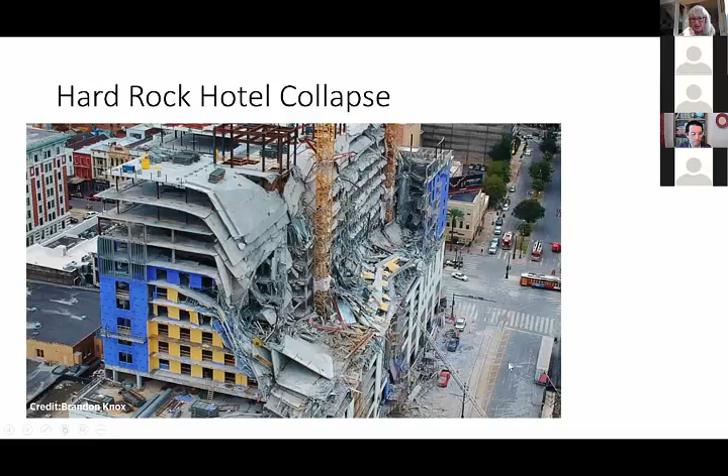So in the background would be the CBD. The street here that you see is Rampart Street. So just a little bit of orientation. I'm going to give you a better idea of where this thing sits in a minute. Because we have a lot of tourists that visit New Orleans, in particular the French Quarter, and because we now carry phones that let us video while we're driving, there are a few videos of this disaster. As the building collapsed, a few of these folks were just going down the street, excited to be in New Orleans and videoing. They just happened to be at the right place at the right time and thankfully, not too close.

I'm going to show you a video from Michael Dalle-Molle. He uploaded this video. He stopped at a red light. See the traffic light? He's in his car videoing, going down Rampart Street, and you can see the site right on the left. This is a clip from his video. It's going to run twice. Here's the tower cranes.

Oh my God. That's the service elevator. Oh my God. Part of the building.

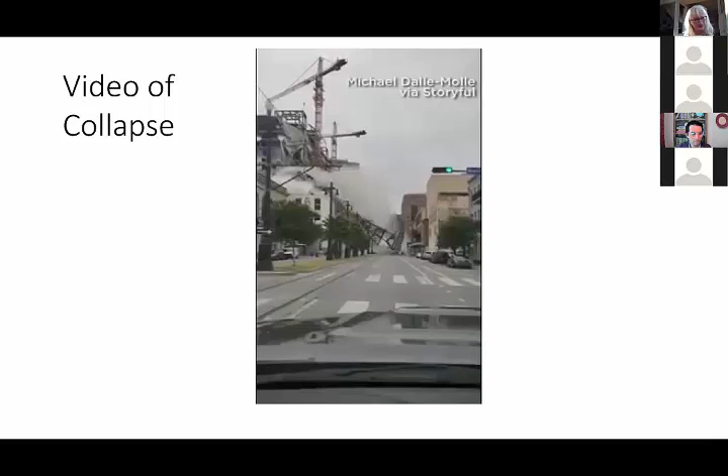So these, of course, hit the internet and were run on local, national and international news, so a lot of people were aware of this. This actually occurred when I was in Miami at the ASCE convention. A year before, the convention was in New Orleans, and during that convention we had the FIU bridge collapse in Florida. So I was unaware. People kept coming up to me saying, "Did you hear about this? Did you hear about this? There was a major structural failure in New Orleans just now." And I went, "Oh, no." So that's a video of the collapse.

So a little bit about the project as it was intended. I don't know if you can see, in the upper right-hand corner is a picture taken of that corner in the 1960s, and it's the old Woolworth building. And you can see right here an old car of that era going down Canal Street.

That part of the city, and it's really in a prime location. It's on the edge of the French Quarter, and across the street is the CBD. In the foreground would be the Superdome a few blocks away. But this area had not been really as developed as the rest of the area around.

And so the city was really entertaining ideas about 10 years prior of how to economically develop this area and make it a more vital part of the city, since it sits in such a prime location. So the developers, 1031 Canal Development LLC, so that's actually the site's address, 1031 Canal Street, about a decade ago approached the city and said, "We'd like to develop this area."

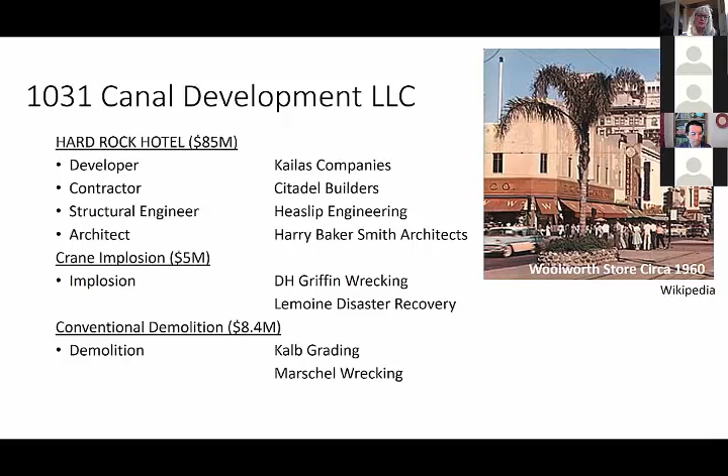The bottom floors were supposed to be a parking garage with about 400 parking spots, with the lowest level, the first level, some retail space, and they ultimately were hoping to lure in a well-known restaurant to also take part of that first floor square footage.

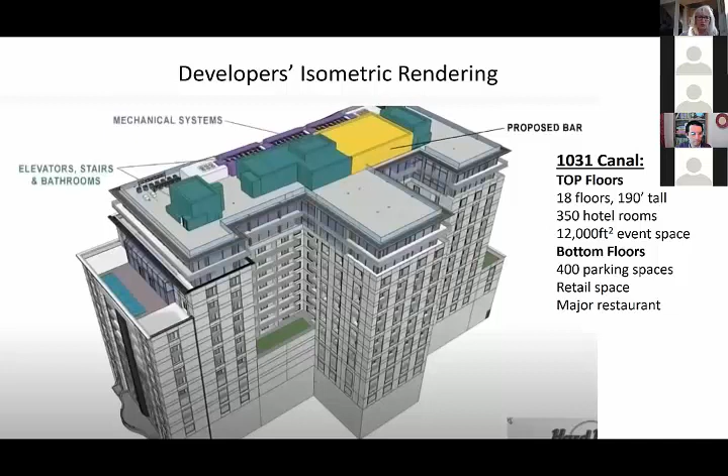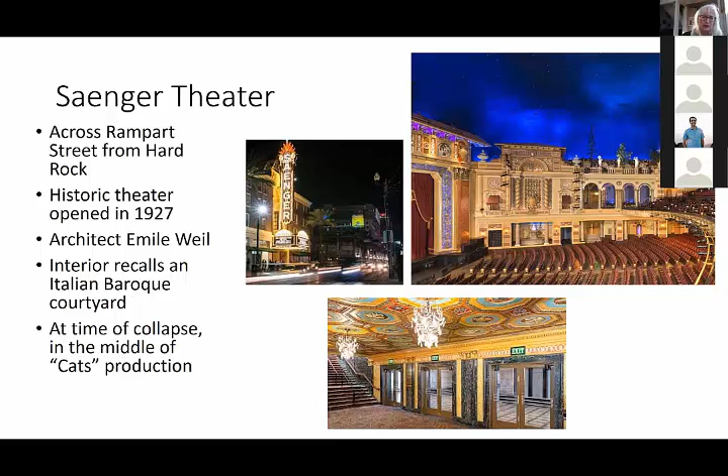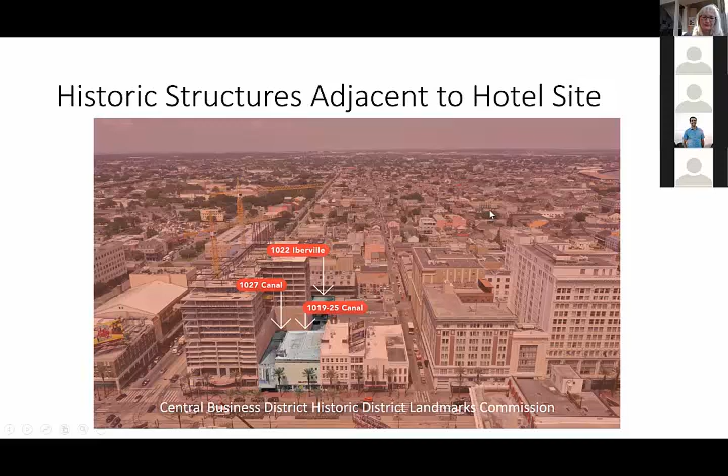So again, some of the historic sites. Here's the hotel. Here's one of the buildings right up close, another building and another building. These three buildings were actually taken down ultimately, much to the chagrin of the historic preservation societies in the city. You'd be standing in the CBD looking into, you can see, the French Quarter. So you can see not very many tall buildings, just along Canal Street you have tall buildings, because of the historic nature of the French Quarter. So the timeline: October 12th, 2019, the building collapses on a Saturday.

We implode the cranes on October 20th. It was imperative that these damaged cranes come down because they were leaning and they were continuing to increase in that lean. The city officials were monitoring the situation, and these tower cranes actually aid in their own erection, and they aid in taking themselves down.

And so since they were damaged, and it was determined that it was unsafe for any crew to even be on the crane towers or on any part of the cranes, the cranes had to be taken down in another way, and they were very tall.

But it was imperative that this happen quickly, because in October we can sometimes still have hurricanes up until the 1st of November. We actually can have hurricanes and their associated high winds, or tropical storms with their high winds, or when you have a winter storm come in, and we're in the beginnings of the fall and winter, you can have a front come in, and we can have some pretty high gusts associated with a storm front coming into the city.

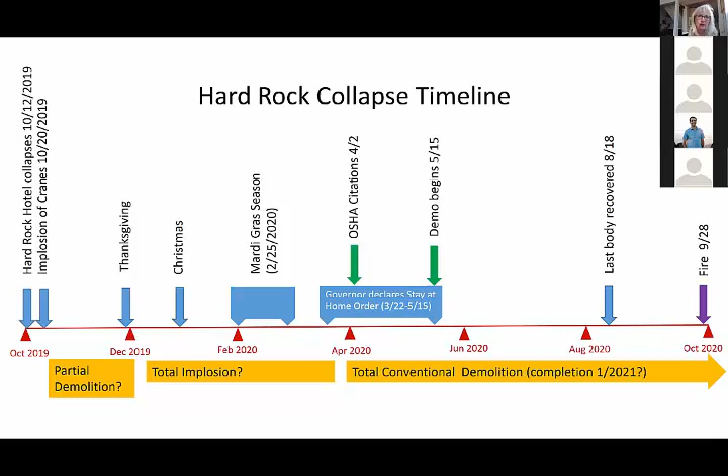And finally, and again, I don't know if our viewers can see behind the boxes, but the last arrow is in October 2020. I actually gave a similar presentation to the Rhode Island section in October, and the day before there was a fire, and again the site was in national news because there was a fire of some construction materials that were being removed. Someone who was using a torch to cut some of the steel so that some steel framing could be removed actually lit those construction materials on fire, and there was a lot of smoke involved, but no injuries, thank goodness.

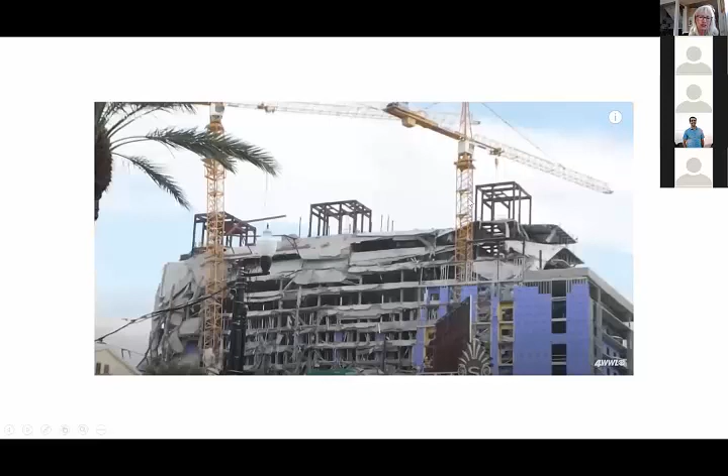So this is a picture of the pancake section along Rampart Street, showing those cranes. So now we're going to focus on the cranes, the crane implosion. They were an immediate concern because of the high winds potentially occurring in the early winter in New Orleans, and not quite the end of hurricane season. Liebherr tower cranes from the Morrow fleet. One was approximately 270 feet in the air, and the other 300 feet in the air, and they were damaged.

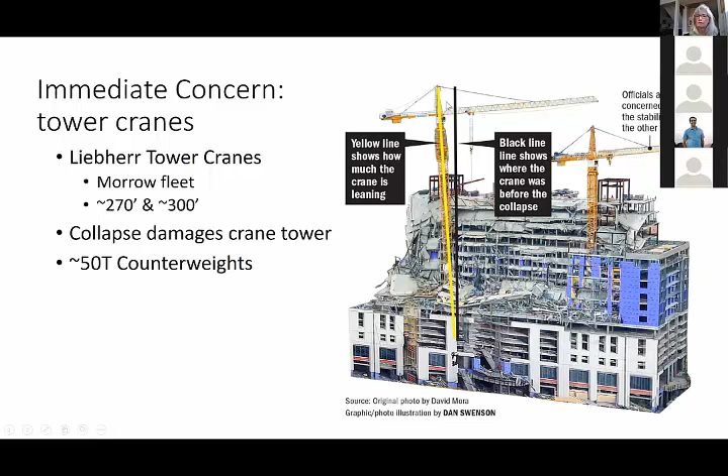You can see from this graphic illustration that I borrowed from Dan Swenson that here is the original tower crane configuration, and it is leaning. The Canal Street or westernmost crane was not leaning as much, but also damaged and also leaning. Each of these tower cranes has, you can see them here and here, a 50-ton counterweight. The cab is not as heavy, but it's heavy, and you've got this horizontal part. And so how do you take these down? So an implosion was selected to be the route.

So for the implosion, we had in the red a temporary evacuation zone, and in the orange a bigger zone, which was an exclusion zone where no vehicles or pedestrians would be allowed. But if you were either in a hotel room or in your home or business, as long as you stayed inside for the duration, and there was a time duration, then you'd be okay.

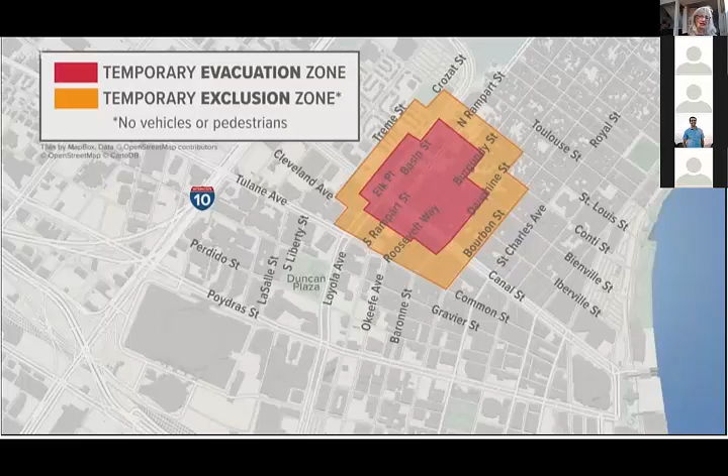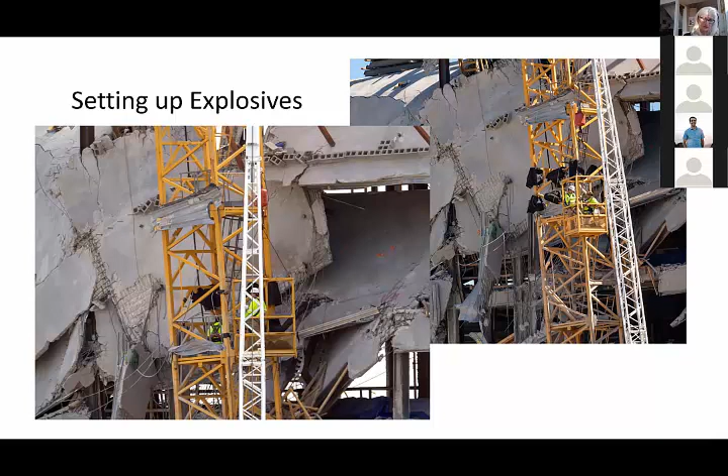So here's some photos of the brave gentlemen putting on the explosives. These black bags are full of explosives, and they're on a crane that is not a tower crane. So they're hanging from a cage. You can't see it in the leftmost photo as well as in the rightmost photo, because the cage that's being hung from another crane is the same color as the tower crane's tower. But you can see the guys putting the explosives on several different locations of this crane.

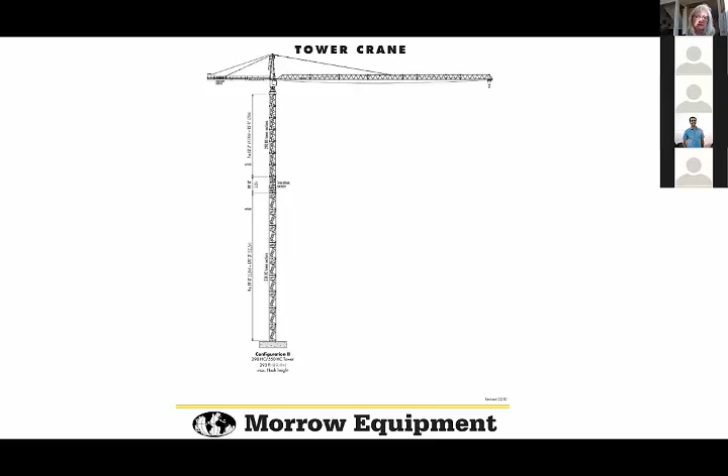So I Googled and found a nice graphic; this might not be the exact tower crane, but it's close. And I put where these explosives were placed, because the idea was, see, these are pin joints, to explode these cables and these cables. Then this part where the counterweight is would fold down. This part would fold down. This part would disconnect, and then it would just, like an umbrella, kind of fall down. Hopefully, if they had pushed it a little bit toward the river, which was into the demolition site, the cranes would fall on the building and not the other direction on Rampart Street.

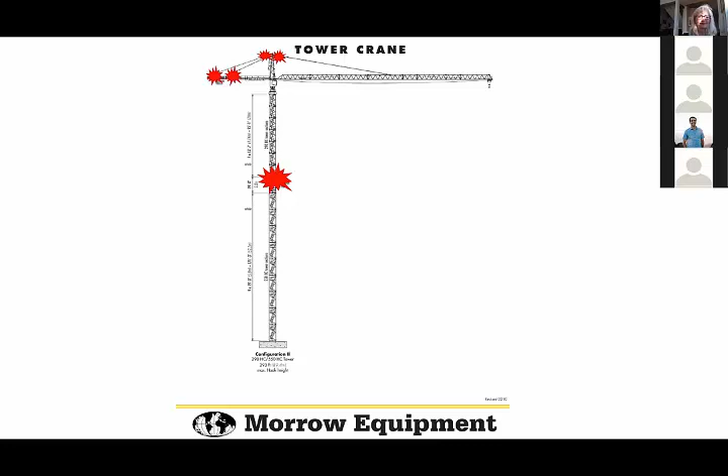So there's a picture right as the explosion happened, and now I have a video that I can run for you. It's going to be a video that shows the implosion of the tower cranes from this angle, and then the tail end of the video shows it from another angle, so that you can see that this is the Canal Street side. This is a busy thoroughfare, as is Rampart Street. Rampart Street's totally closed here, and Canal Street was totally closed for this. Some lanes are open now. So let's start this.

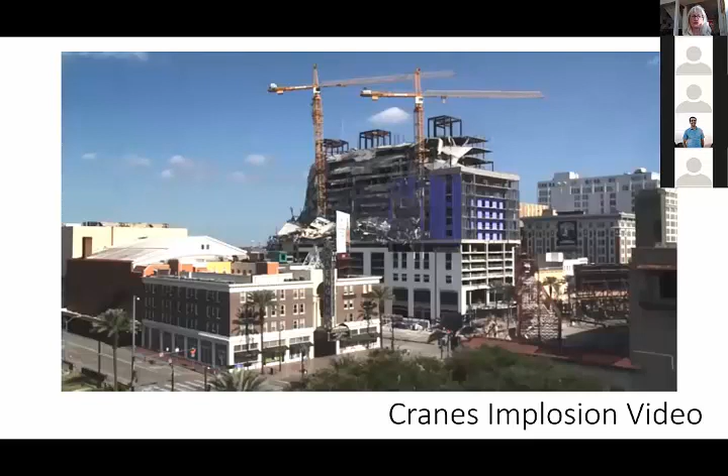It's gonna blow any minute. Watch the cranes and where the pieces go, and see if they fold down like an umbrella. They're folding. Oh, watch that east one. Oh, that's the part that got impinged about 10 feet into a street very close to Rampart Street, so very close to all of those utilities. Very luckily, just one sanitary sewer line was impacted and able to be repaired pretty quick. So we're about to see from this side the implosion, showing the Canal Street side crane, and if you notice, there it goes.

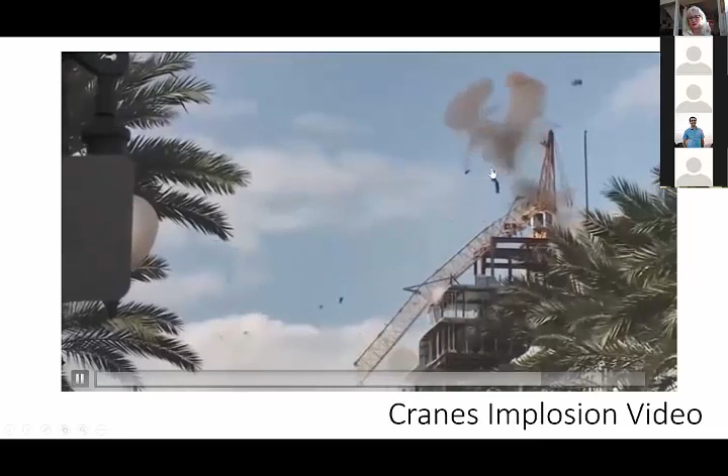So this is still hanging. This is a pretty big piece of steel, and it's just hanging off the top of the building on the mostly undamaged side, and then hanging over Canal Street. So you've got these major counterweights, though. So I think that, from a 10 being a 100% great implosion to a 0 being, oh, we didn't even get the cranes down, this was closer to a 10. It didn't get all of the pieces of the crane down, but the cabs and the counterweights have been flung into the structure. The adjacent buildings suffered very minor damage. Windows blew out.

Nobody got hurt, nobody got killed. So, for the most part, the cranes are not as dangerous. This is the most dangerous piece, the piece that got hung up on this part of the steel moment frame. There's 3 steel moment frames. It got hung up on the steel moment frame that is closest to Canal Street, and it's hanging over Canal Street, as you can see.

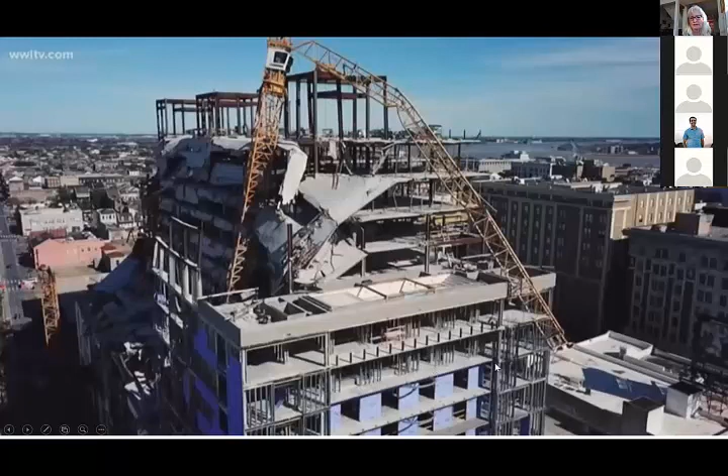So here it is. These are the 3 moment frames. This moment frame is closer to Canal Street. Canal Street's running this way, and this is hanging over Canal Street. So let's move on now to actually talking about the demolition of the Hard Rock. It was decided to do it the old-fashioned piece-by-piece way instead of an implosion.

So these are the sites of the 2 bodies. One was between the 8th and 10th floor, and then one they estimated between the 9th and 10th floors. So they knew the location of one because you could actually see some of it, but the other worker's exact location was less known.

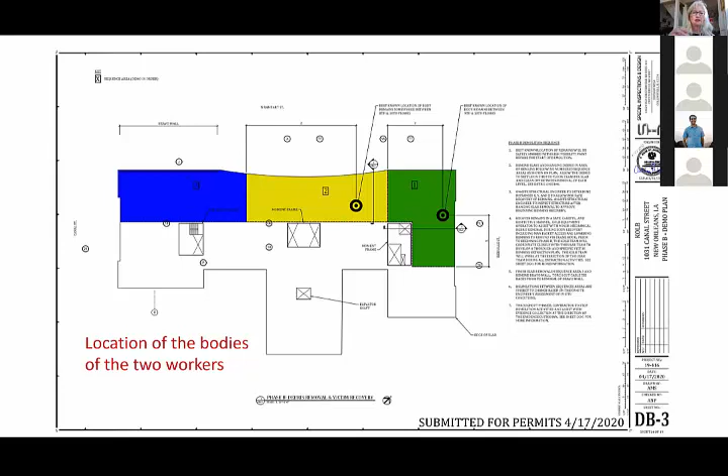Moving to the OSHA preliminary citations. This is not a complete listing. I'm only looking at some of the citations against the contractor and the structural engineer that would be pertinent when it comes to looking at this structure and what caused the collapse. So a little bit about OSHA though.

OSHA was created by Congress in 1970 by the Occupational Safety and Health Act. The whole reason behind it is to ensure safe and healthful working conditions for working men and women. It does that by setting and enforcing standards, and it provides training, outreach, education and assistance. Its enforcement, of course, is part of the investigation that OSHA did for this event. The Act covers private sector employees and workers, and some public sector employees and workers.

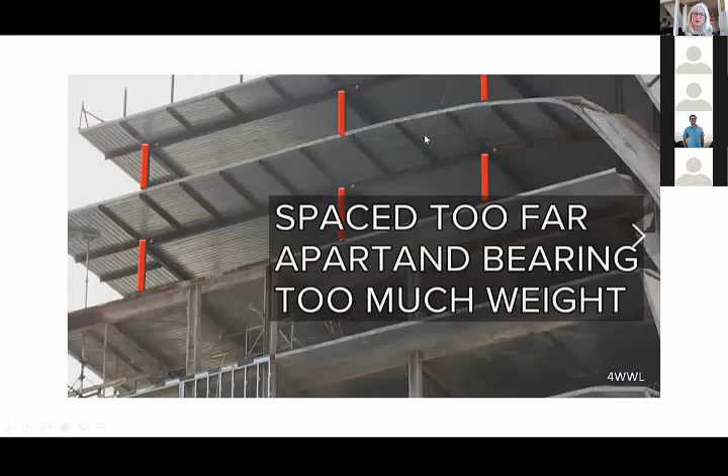So let's look at Citadel Builders, the contractor. Citation 1, item 3 was a serious violation, and it talks about the employer failing to ensure drawings or plans for beam shoring. I'll have another slide on beam shoring shortly. Oh, here it is.

I did not put the video here because it doesn't show up too good. This is just a shot of the video, but it shows a piece of shoring. It's bent, and this gentleman is a Hispanic worker. This occurred on Saturday, so it was not all of the workforce working, thank goodness. It was those that wanted to work overtime because they really wanted to get this hotel complete in time for Mardi Gras 2020.

So in the video, you hear this gentleman taking a video of this bent piece of shoring and saying, look at this, Papo. He's evidently talking to Papo. Look at how it is bent already. They couldn't remove it because it's too bent and it was under too much pressure. So there was a lot of discussion as to whether this is evidence of a causal factor for the failure.

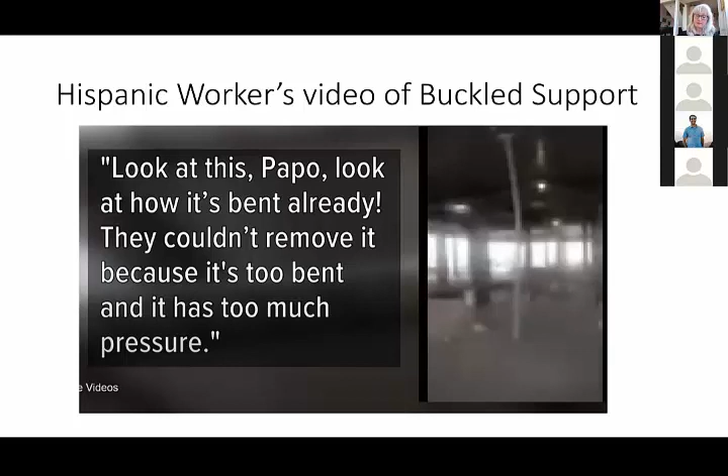From my point of view, this Hispanic worker, a couple of days before the failure occurred, sees this, it upsets him, but did he talk to his supervisor? Did he feel empowered to talk to his supervisor? And would it have made any difference if the supervisor came, looked at it, said, oh, this looks really odd? Maybe they would have discovered some more deflections, and we may have been able to avert at least some loss of life in this disaster.

So this is a citation of Suncoast, Hub Steel, the steel people. Citation 1, serious, talks about steel erection activities where steel beams on the 16th floor were not connected to columns on the 15th floor per the contract documents and did not meet specific load requirements, exposing employees and other workers at the job site to struck-by and crushing hazards.

So that's the last of my citations. That gives you a little bit of an insight as to what might structurally have happened. It doesn't talk about what caused what first.

This is from the video. You can see that this was a cascading set of failures. Something initiated it, and as that top floor failed, it fell on other floors with perhaps not as young a concrete as the top floor, but still under early strength, not full design strength, subsequently failing those, and so you have a series of collapses.

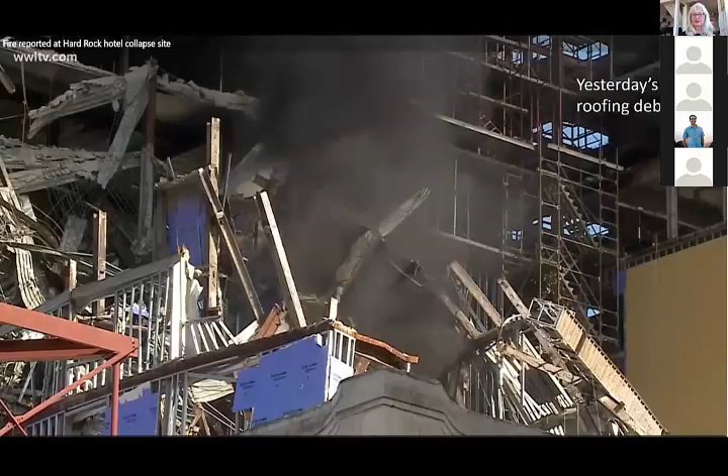So I mentioned that there was a one-alarm fire on the 28th that got this building back in national news, and at the time, January 2021 was the target instead of October 2020. Here's a picture of the smoke, and we have most of the steel taken down.

You can see that this is a pile of steel, and the burning construction materials was in this pile. And here is a crane boom that has the firemen. So they're actually squirting water from this cage onto the burning materials.

So under current conditions, we're still behind schedule. It's still not complete. It should be completed by March 2021. And in mid-February, the City Council asked the City Planning Commission to consider revoking the conditional use permit issued to the developers, because now that we're close to having a clean job site with now 3 adjacent buildings removed, it's a bigger footprint that they can work with. I didn't mention it before, but a couple of members of this development team own those buildings that are now no longer there. So the site can grow in size.

And here's a more recent shot. So this is just a couple of weeks ago, showing that they're down to just the reinforced concrete 7 floors, the bottom 7 floors that were the parking garage. And so you can see that it's now looking just like a regular old demolition site.

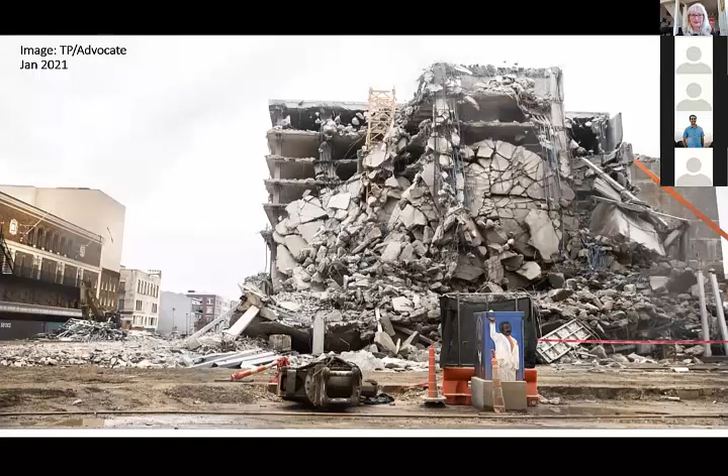I was thinking, well, the people in our profession are going to take a look at this failure and ascertain the causes of it, and then see if there is some kind of a trend with other failures, and then that will allow our profession or associate professions to make modifications. And the more I looked into this, the more I found that that is not necessarily true. So I got to looking into how can we make that

a more intentional process. And I came across something called CROSS US, which is an entity funded and under the Structural Engineering Institute, which is one of the institutes of ASCE. So CROSS US is part of an international CROSS organization, CROSS International, that is located in the UK. So in the UK, I believe probably 15 years ago, they looked at a model that is actually a US model in the aviation sector.

So FAA has an entity that was stood up and actually is paid for, I believe, by FAA on the aviation side, and they've got an arm called the Aviation Safety Reporting System, ASRS, where anyone in the aviation industry that sees something that is a near failure, a near miss, they can report that to ASRS with no fear of their name being let out.

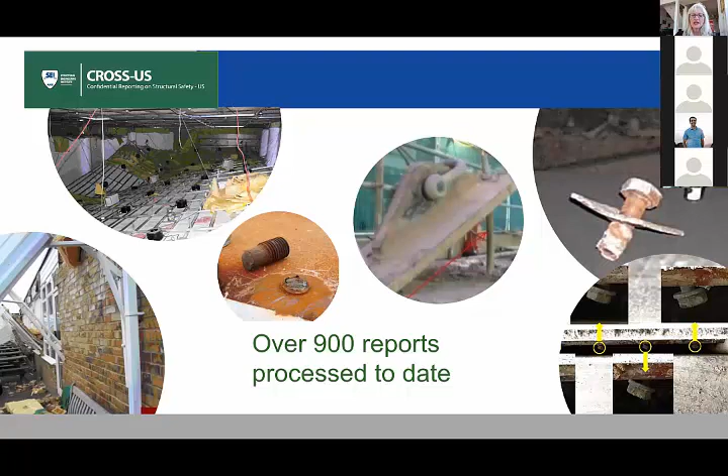So you receive a report from someone, the report is processed, meaning all of the information that can identify who and where are removed, comments are added, the report's published, and as you develop this library of reports, you can see some commonalities and start influencing change. So we have in the US over 900 reports in CROSS US. This is CROSS International: in the UK, there's one in Germany, there's one in the US, one in South Africa, and one in Australia. And there's talks with other places in order to stand up

another CROSS organization. So the folks that are most active here with CROSS are Glenn Bell, former SEI president, and Andy Herrmann, former SEI president and president of ASCE. There's an expert panel that actually looks at all of these initial reports, redacts the information, and it's all done confidentially. And you can see some of the other folks.

I actually interjected myself into this, and I don't know if the SEI board approved me, but I now sit on XCOM because I believe that this is important work, because from my looking around and trying to ascertain if we're going to learn any lessons as a profession from this disaster that occurred in my backyard, and finding out that probably not, or not intentionally, not with any intent, I got involved.

So this talks about the scope of the issues, where small events are important because they are often precursors to more major failures, and the more reports that the entity gets, the better we can then look for trends and then work to minimize the impact of these issues before we have serious failures and collapses.

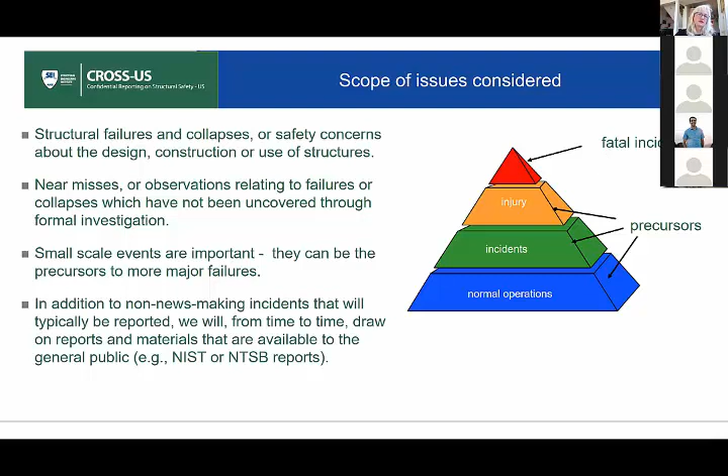So right now the focus is on any civil structure: that can be buildings, bridges, geotechnical, dams, power transmission towers, industrial buildings, power plants, primarily in the U.S. I talked about the location of the other CROSS, but CROSS-US will look at the entirety of North America. So far, it's not the other types of engineering, so mechanical, machines, automotive, but CROSS-UK just added fire. So there's a move to actually broaden the scope.

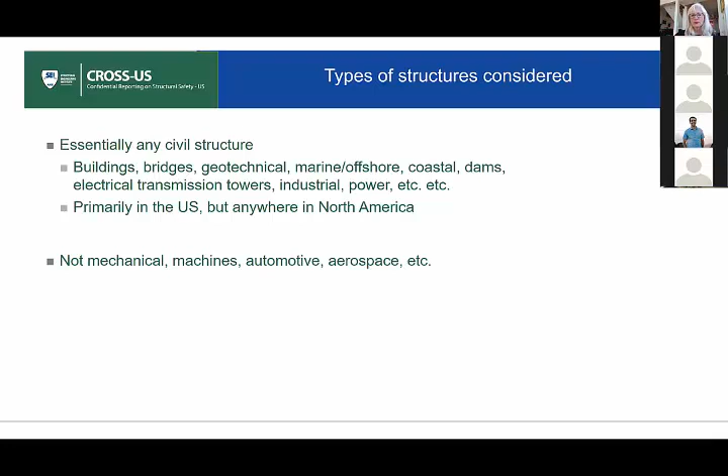So if you're interested, take a look at www.cross-us.org. That's the website. Please, if you see something on a job site that is unsafe, this is a way that you can report it, and that we can learn from it and perhaps prevent someone else, some other worker, or the general public being hurt by a failure. So with that, I'll call it a day.